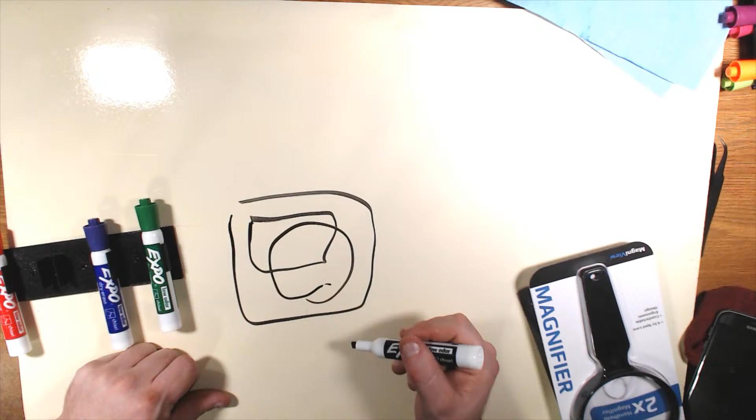I left the house after dinner around 6:50 and went to the dollar store, hoping they'd have some kind of cheap magnifying glass for this project. The do-it-yourself projector is basically just taking your cell phone and putting it in a box so all the light goes in one direction, and then in the front you put a magnifying glass. You can adjust the focal length by moving the cell phone, or in this case, we're going to move the lens back and forth. So that's the plan for today.

I went out looking for a cheap magnifying glass. The dollar store didn't have one. I was also looking for a couple other things at the dollar store I've been meaning to pick up, and they didn't have any of that stuff either. Went to a different dollar store in the same strip mall as a Five Below. Neither of those had them.

Decided between the dollar store and the Five Below—I'm blitzing through this quick because it's way later than I want it to be—but there was a thrift store. I decided to stop in there too because there was something I'd been wanting to get at a thrift store, and I figured, it's right here, may as well stop in for 15 minutes. Spent 15 minutes in there assuming Five Below would have the magnifying glass after the second dollar store didn't. Did not happen.

There was also a Staples next door to the Five Below. Did a quick price check on that—they were way more expensive than I wanted to pay. So I did a quick Google search and ended up deciding on Walmart.

Walmart's 10 minutes down the road, so we'll go down there. Meanwhile, we're now at like 8:10ish, so I've been out for over an hour at this point between traveling and going to all these different stores. So I'm like, all right, whatever, hit Walmart and be done. 10 minutes down the road, 10 to 15 minutes home, 5 minutes in the store hopefully—another 25, maybe 30 minutes depending on what happens. Bit later than I wanted to be, but it'll be all right.

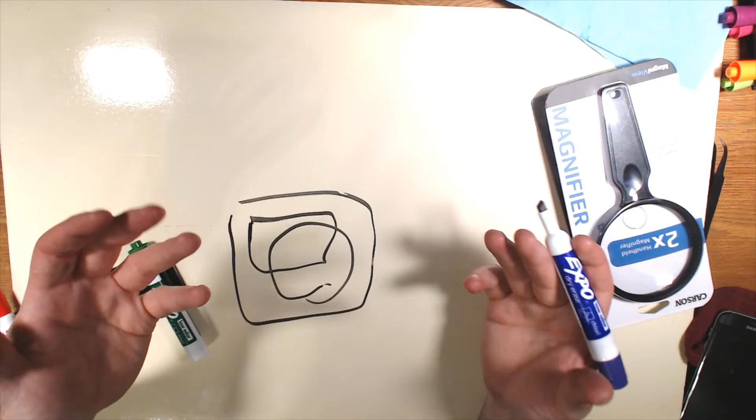I had considered going to a grocery store, but figured it would take longer to find it inside a grocery store than stopping by Walmart. That's the point it occurred to me to try a grocery store—that's another option. So if you're looking for a magnifying glass to do this project, at the very least Walmart, again $5.50, not bad. Wasn't the under-$5 price I was hoping to get at the Five Below or the dollar store—again, the dollar store now carries items above $1, for the record.

Anyway, those are your options in case you go looking for one of them. Walmart, $5.50, at least in my area. And then otherwise, CVS or Rite Aid may be a good place to check.

With this project, normally the super simple DIY version is to put it into a shoebox. I do have a shoebox available that I could use, but I figured I may as well do this properly—well, properly, this is still a DIY thing. What we're going to do is use my 5/16 rods. I'm also going to leave the door open to use extrusion, but it makes more sense to use 5/16 rods. So we'll have these set up in an array like this, just a square.

I'm going to have a back plate to hold the phone and also hold the rods. So rods will go into the back plate, and the back plate will also have a clamp to hold the phone. Then on the rods, so that we can change the focal length of the projector, will be the lens. That will have four little riders—four little connection points for the extrusion.

I'm also considering putting hinges in between here, because I'm not 100% sure, since I've never made one of these before, but I think there may be a possibility where we have the phone, and then our box. I just didn't want as much in the way, that's why I'm drawing it over here. And then the magnifying glass at an angle—I'm not 100% sure this works, but if we can, the light goes this way and then refracts in a different direction. This seems like an interesting idea to me.

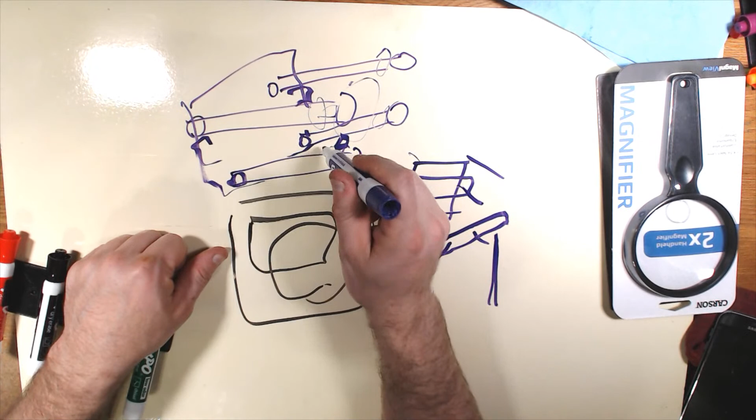So we may put hinges on these round parts. That may be something I add later. Again, I wanted to have this stream started by 8, and it is now nearly 9—let's double check that, yeah, nearly 9, 5 of 9. So it's getting quite late for me, relatively late. I want to have this done a lot earlier.

So hinges are not a priority. Holding the lens in place is, because currently my plan is to mount this overhead and project onto my workbench at work—that's what I need this for. So the little riders that the magnifying glass will be on, I want to put set screws in to hold it in place.

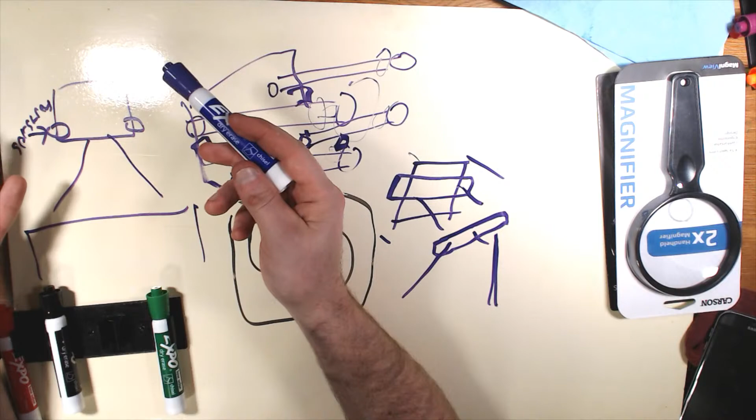So that is the plan. One of these situations where if I don't put the hinges in, we actually only need, let's say, 2 set screws. We could put all 4 in, but I'd only really need 2 to make sure it's relatively straight and stable, just opposing corners, and not sliding down. I may even get away with 1, but 2 seems like a reasonable minimum.

So that is the plan for design. I think I color corrected and did the exposure right, but I had unplugged my camera, so if anything looks a bit off from previous streams—I don't think it does, I think it's about right—but in between my camera being unplugged and the settings resetting, and this light over here, the hinge on it is actually gone. So it is literally staring straight down at the table instead of a bit at an angle like this one over here.

We are 8 minutes into the stream, and we're finally ready to start designing. Let me move my stream off the screen you're about to stare at when I switch over to Fusion. And here is—okay, that is not Fusion evidently. Desktop not available. Great. Desktop. Shoot, I sure hope this is desktop too. All right, cool, it's desktop too.

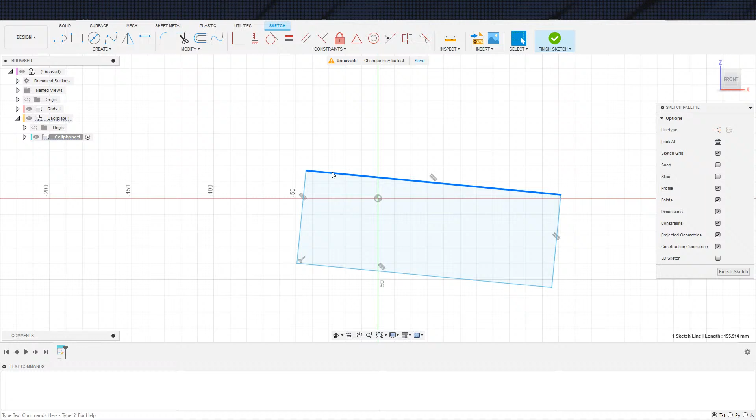So, cell phone front, there it is. Go ahead and toss that in there. And as I mentioned...

Extrusion might be more available for people. For the record, I said 5/16 rods, right? That's what I have because I get them for free out of the scrap pile, but 5/16 is basically 8mm, a little under 8mm. So for this specific set of STLs, all you would have to do is just drill out the holes to 8mm in order to get them to the desired diameter.

So I'm going to call this 12.5 on thickness. So that's our cell phone.

Black plastic. Plastic, where's plastic... glossy, black.

And then we switch over to face, and toss the screen in there. Or LED, I guess.

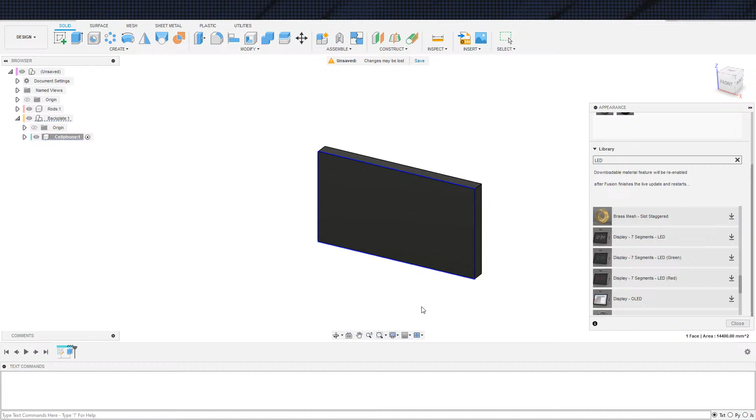There we go. Didn't they have... oh, there it is. I was going to say, I thought there was another option for that. Oh, I was on the back end. Good thing it did not take. Huh, that is funny. I've done... oh, it's not downloaded for some reason. I know I've done this before.

For example, on our phone holder, I put the screen on there. Huh, okay, display. Do I have a display? Okay, there we go, LCDs. Excellent. Whoops, that is not the face though. Face. Display. LCD. There we go, all right.

Upside down, but we'll live with it. So, that is that. We can go back to the back plate.

Actually, one other thing to mention: I'm assuming that it's normally inside a box in order to direct the light. I have these cloth napkins that I was using for recording videos, for placing objects on just to make the display nicer when I was doing the product displays in my earlier videos.

I just plan on using those to wrap around the rods here. It's one of those things - however you want to enclose the rods here is entirely up to you.

And also, the nice thing about cloth is that since we're sliding the lens back and forth, so long as you fully encase it in cloth, the cloth will just crumple up. It's cool, it's fine. What I'm basically saying is that the cloth can be attached to the front lens and the back plate, and as it gets shorter, the cloth just crumples up. That's the idea - I could have said that in a better way, but you know.

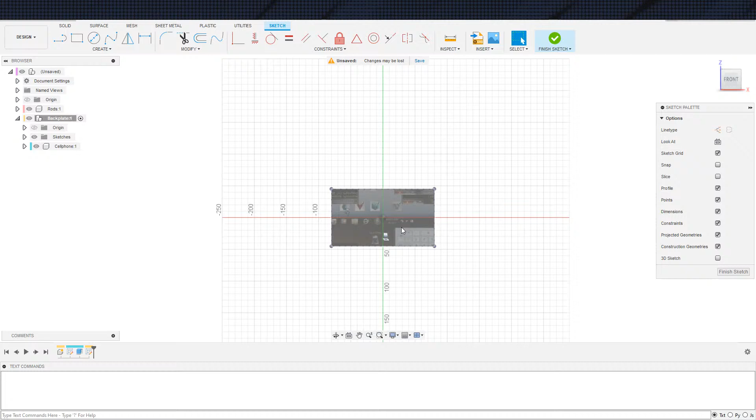The magnifying glass that I've got here is a 3.5 inch, I believe. My calipers are saying something like 96 millimeters. So if we, in theory, call this about 100 millimeters, I was thinking of doing some kind of clamping mechanism for the magnifying glass, so that in that case we can make it adjustable to accept different sizes.

It is a little bit tricky though, because most clamping mechanisms are biased towards one direction, and for that reason it may not work out as intended, unfortunately. So that may be something I have to change from my original concept.

Lens, or I guess I should call this lens plate, because I planned on mounting it onto a plate, which then would attach to the rods. Oh no, that's right, I was going to do a plate and then the hinges. So actually it's a question of how exactly that should be designed.

Alright, so again, I need this printed by tomorrow morning, and it is quite late. For right now, I'm just going to do a lens plate. We may revisit this when I go to release the STLs in the near future, and I will have included the hinged version. But since I don't know that I have the time to do the hinges, I'm going to go ahead and skip them.

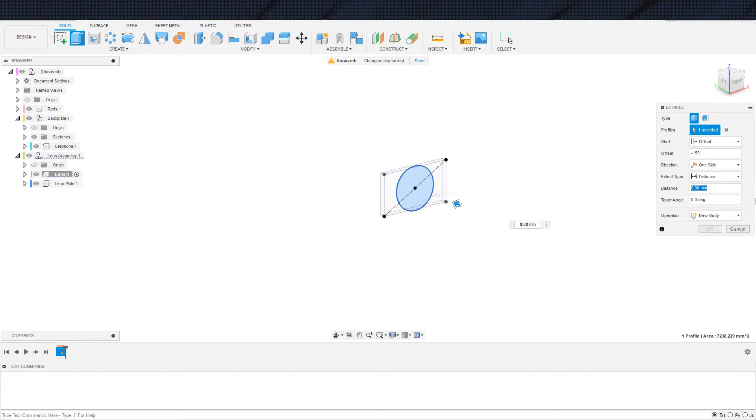I'm mixing things up. So the thickness on this, now that I have it open, is 13.75, so we're going to call that 14 millimeters. Actually, no, I should keep it at 13.75 - I shouldn't round that one.

It's one of those things - the geometry here is a bit different, however, and this is the one thing I'm a little concerned about. So yeah, I don't feel like going back to the store at this point. The lens has one of those bubbles, one of those additional magnification bubbles in it. I don't know how that's going to screw up the projection, which is my biggest concern at the moment.

Unfortunately, of all the magnifying glasses I looked at that were available in stores - when I searched Walgreens and when I searched Walmart - I believe all of them had the additional bubble, the additional higher magnification bubble in there. I'm going to do a quick search on Amazon really quick to see what they've got. I didn't want to use Amazon because I needed this magnifying glass by tonight, but let's see what happens.

Okay, so I see one, two - yeah, it doesn't look like that one. Alright, so they have a relatively cheap one, actually a couple relatively cheap ones, that do not have the additional magnifying glass in there. They are also 100 millimeters, which, if that's the size of the lens, would make it larger than mine. Although it's possible that's not actually the size of the lens - that's the size of the outside, in which case it's more or less about the same size as mine, about 5 millimeters off-ish.

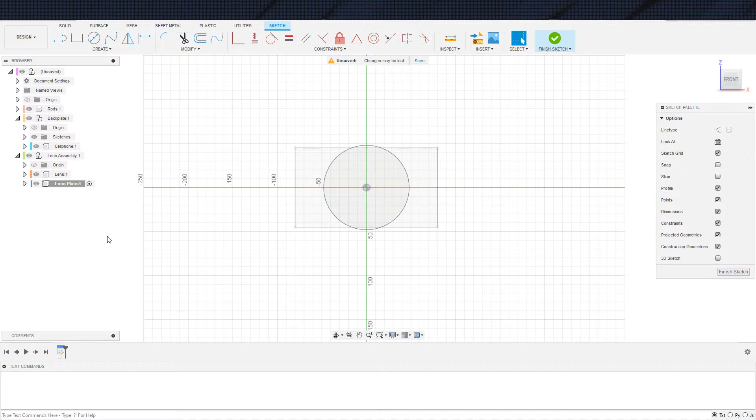Actually, because mine has this plastic rim on it, I can probably clip onto that no problem, so that's what I'm going to plan to do. So that size I have written down there is not the actual size of the lens - that's the size of the outside plastic rim. So at 83 millimeters we have the actual plastic lens, 83, and I can go ahead and toss some clips in here.

Makes sense, and we'll probably just do that with another circle. So let's just go 3 millimeters here - that's all we should really need. Although, I'm just thinking there's a little bit of a lip on it, and that's about 3.5 millimeters, so I may want to go a little bit bigger than that. Maybe do this - maybe make it a 2-step.

I'm not really thinking ahead on how this is going to print, which is the one issue I'm seeing here. So that's going to be a little bit of a concern, and I will make this plate round for right now - that makes sense to me. And then we just need to decide... I guess I should - nah, I only really need.

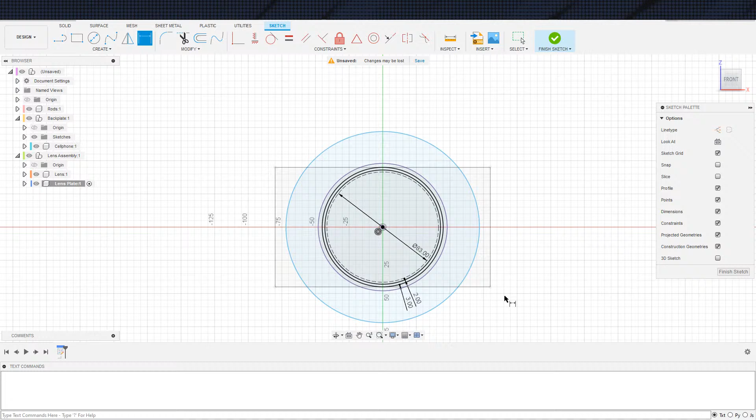Remember how I was talking about the fact that we have cloth around here and I wanted to do hinges? If I made this a square plate, a rectangle plate, a parallelogram plate, that would create a solid edge for the cloth to attach to, so I can wrap the cloth around the box like this, and that's super easy.

If I did a circle here and then did legs out to the corners to attach to the rods, that actually would leave gaps for the light to get through. And I think the idea is to keep as much light contained inside the box as possible. So that may be a bad idea, and we may want a solid front on this. That's my intuition. I've never made this project before, so I'm guessing that's an important feature to keep in mind.

In that case, we're going to start out with just a rim to work off of, and then I will do the back plate. From there, I will extend this rim out to whatever is necessary. This is just the start of our plate right here, just to get an idea of where it's at, so we can project off of it for the back plate to get a height. Then from there, we can adjust this front plate to match the back plate. That is the point here.

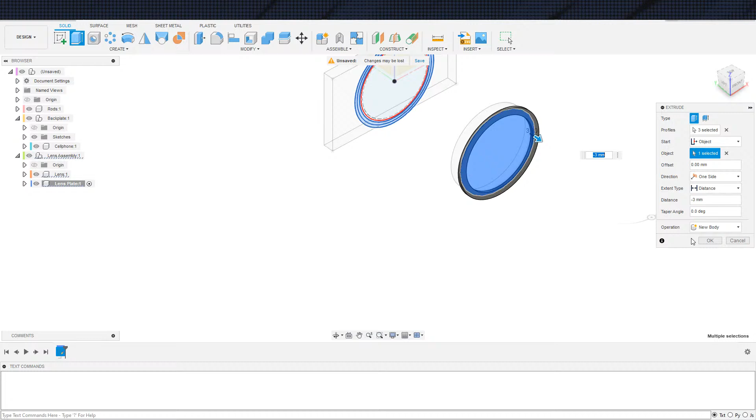And I will go ahead and do the clips right now. I don't think there's any reason to wait on doing the clips. So let's hop back into that sketch and toss my clips in here.

Assuming that I'm going to put the handle out this side, I will go ahead and... actually, it occurs to me that the handle is going to have to come off, because the handle would have to go through unless I put it on the outside. You know what, I can put it on the outside. So that does change my orientation here a little bit.

Alright, I'm gonna put these clips in really quick. Let's just get that done and over with because I keep on procrastinating. Let me grab this as a reference. Actually, no, I can just use the center of this tool. I was just trying to grab some center points to work off of, but those can be that dot right there.

I think this one was the one I just did on the other side. I just want to try to have them on the same circle. So there's some center lines to work off of, and now we can go ahead and toss this in here. Get a center line point to line it up with. Click that, and actually, I should be able to just rotate this around.

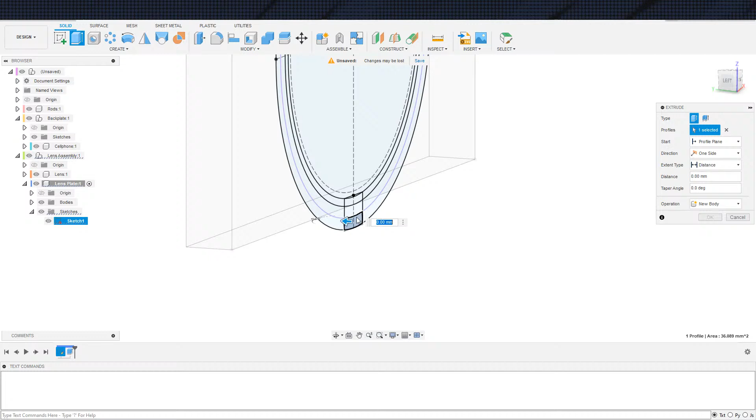And again, my orientation here, actually let's fix that really quick, because I'm actually going to want to come this way with it. And that will now be a positive number because we're going in this direction. Now we'll come back and fill in this clip.

So it's just there, from object, there, distance, object, here. Okay, and then these three guys, from object, there, and we can just go 3 millimeters. And then this guy, again, going down into, around rather, that rim that I mentioned. My depth there is pretty deep. I can actually go pretty deep with that.

But, oh no, I take it back. It looks like it's pretty deep, but for the 3 millimeters out that I'm going, I'm actually only going to be able to do like 2.5 millimeters, unless I came further out into the lens, which I don't want to do. Or not into the lens, but into the rim. Therefore, minus 2.5, we'll just stick at 2.5.

And then I do have to add some geometry from object to it because the geometry is... oh, not my... there we go. Join. Because the ring is round, so we have to go ahead and toss this guy in here. And I'm going to go as far as it wants to let me. Okay, it wants to let me go a lot. So I will stop at...

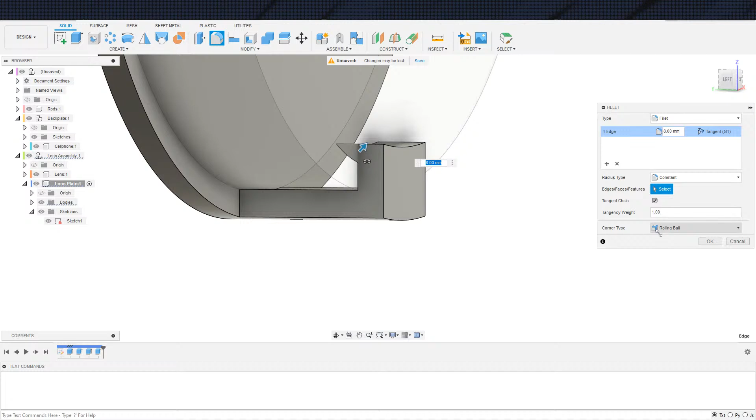One of those things, it's not actually necessary for me to be super precise. And actually, I cannot get the larger fillets in here because the lens is in the way. So, unfortunately, we are going to just have to guess, or use my best judgment, is what I was going to say, but I'm not really making a judgment. I'm just kind of saying, that looks good enough.

The one issue, I guess it's not going to be that bad. I was going to say, this is hanging. This plate will be printed on this face, so that is overhanging. However, it's probably not going to be that bad. We will have to use supports. I try to avoid supports at all times, or in all situations that I can. This will not be one of the situations where I can get away with not using supports.

Just going to have to be. Do we want to stick at 3 like that? It looks to me like the lens handle. I mean, if the lens is on the outside of the plate, then the lens handle doesn't necessarily matter which way it's pointing. So we could just do those 3.

I was thinking my original plan was to go 4 and then just suppress this one over here. But it shouldn't actually make too much of a difference to only have 3. The last issue that I can see is just getting it snapped in and out.

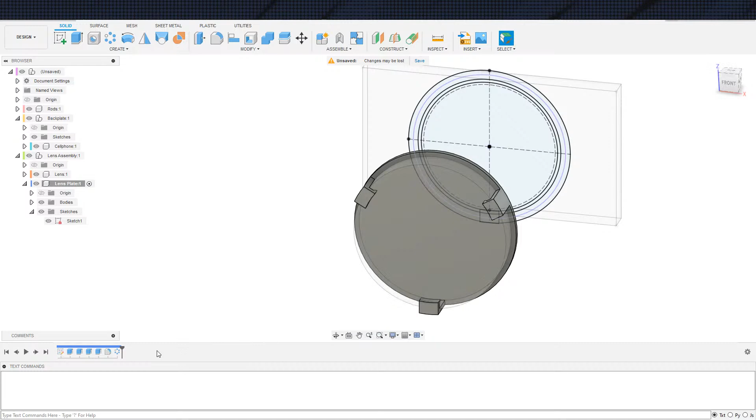It may be better to, instead of that 3mm that I have here, take this down to - actually, it would not even be this 3mm here now, would it? I would actually want to toss another circle in here. Go 1.5 right here. And then finish, adjust these extrusions right here. So adjust that one, adjust this one. That should be enough.

My body yet? There's my body. All right, cool. Yeah, so now that's a lot thinner. That should be a lot less difficult to get these things snapped in here. It's still going to be difficult, actually, now that I think about it.

Let's see. If I went to 4, suppress, click that guy, then back to these lips, whatever I'm calling them, lips. Probably do a good enough job holding that in, so I can slide it in from the side, and that should probably be fine. Okay, I'm gonna go with that one. So we're back to the original pattern here. Just gonna make it easier to get the lens snapped into place.

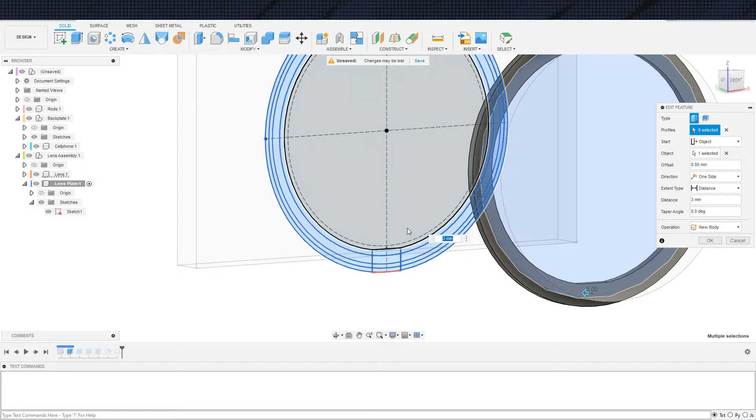If this does not work, I will cry, but assumption is going to - that is my lens right here. There's my lens. Yes, the dashed line is my actual lens. We are a little past the dashed line, so that's the acrylic right there.

What did you just do? So we will have a little bit of plastic in the window, is what I was saying. So as you look through this front, wait, what are you? Okay, so that wasn't me the first time. Evidently.

Okay, just so that we're on the same page. You saw me fix my selection there, and then Fusion decided to break it. Okay, ready? We're here. I click this. There's a hole in there. I hit OK. There is no longer a hole in there. Fusion, go home, you're drunk.

What in the world are you doing? And I've got the stupid paint select on. Why does this tool even exist? Okay. Okay. Let me turn this off. Let me turn that off. Gonna do that. Deselect that. Deselect that.

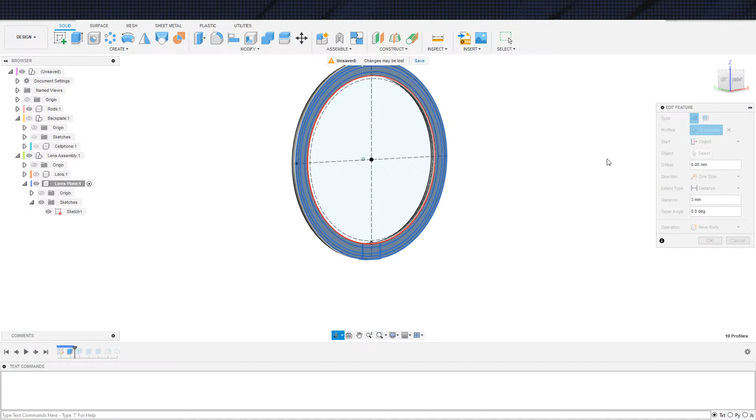I'm going to select lens at the back of the. Okay. There we go. I think what was happening there, even though the picture was updating correctly, it's possible that when I was deselecting, it was changing the offset. Although, no, that doesn't make sense because the plastic was all the way out here. I don't know. Fusion was just drunk. I don't know what to tell you.

So, there we go. We got this in place. We have a general rough idea of where that needs to be. So now we can design the back plate now that we have both the cell phone. Although, yeah, I should probably design the clamp really quick on the cell phone. How do I want to do that? I think I'm gonna go ahead with the back and front clamp again, like my other designs. So we got the back plate, we got the cell phone. Now we need the cell phone clamp.

I'll tell you what's funny. Because I see smartphone all the time, I actually double-guessed myself just now on whether or not that's how you spell cell phone, because I have not seen anybody actually say cell phone. They normally say smartphone, like, forever.

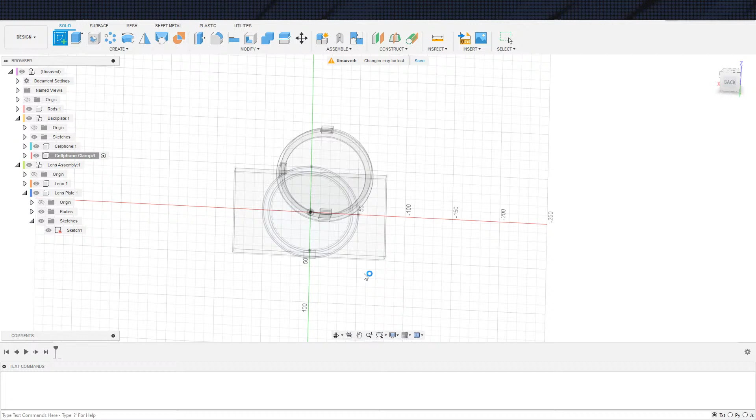So, project that out. That is the largest size I need, so the clamp needs to be capable of moving closer.

For sake of the argument, I'm thinking, nah, I probably won't. Never mind, I take it back. I was thinking about putting a little lip on the bottom here to keep it from sliding down, but probably what's going to happen is on the back plate, I'm just going to put a little ledge to keep it from sliding down. So instead of building the lip into the clamp itself, what I'm trying to say is I'm going to go ahead and just do it as a separate component on the back plate.

And I'm going from the top here because that should be easier to design. Let me turn the sketch off. Then we can turn the rest of this off because I don't need it now. And now that I have the projection, I don't need that. We can do that. And now we just need to draw a little bit of a clampy boy.

So I'm going to start out here. Was that two lines? That was in fact two lines - good old Fusion double line. So this is right-angled. That is fine, we will put this at 8mm. Probably sounds fine to me. And then...

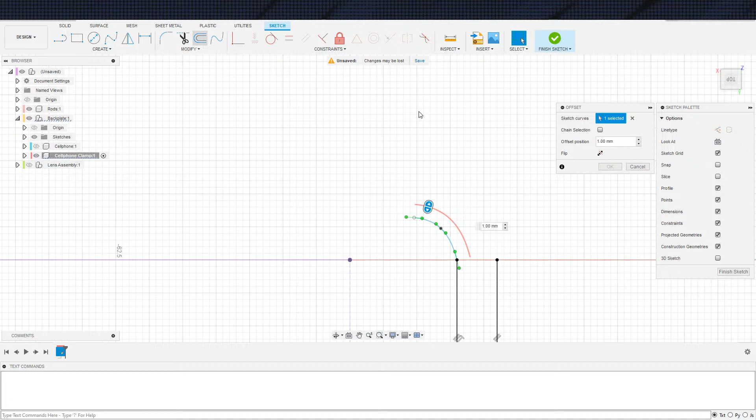And finally, we can just draw a little bit of a flip here. Where is my... okay, there's my okay, all the way there for some reason. Offset. See what offset looks like. Yeah, it's not going to connect. We can make it connect. That's fine, so you are now just going to come all the way up here.

The other idea I had, for the record, was I would do the back curve instead, and then offset the back curve to the front - that was the idea, that was the alternative idea. And honestly, that's probably good enough.

So, cell phone back on. It doesn't necessarily need to be the whole length of the cell phone. So let's do a two-sided symmetric hole. We're at 96 right now, so let's make it 50. And then this is going to be a new component for the right clamp, or I guess left clamp.

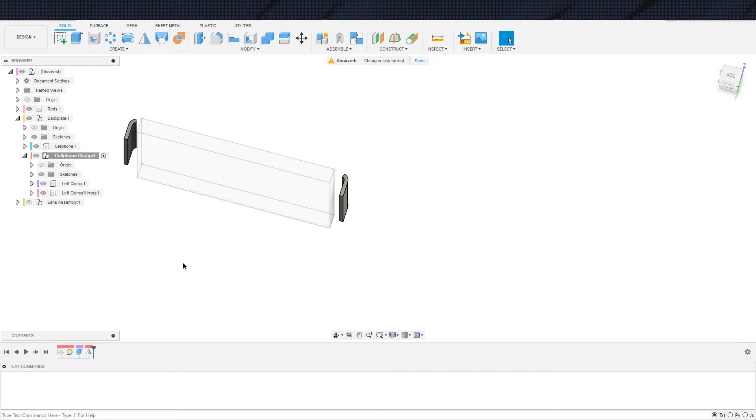And then we can mirror this across - component, left mirror plane, that guy. Okay. Although, let's see... nah, I guess that's fine.

The only thing I'm going to change, it occurs to me, is that guy - instead, because we need some stuff in the back, we'll make this like 6. Again, I'm going to make this similar, I believe, to my other ones, so I'm going to put a dovetail in here. Although it's not going to be strictly similar, is it? No, I can make it.

All right, I was going to say, because the plate is going to be larger - so on my other designs, let's go ahead and pull up one of my other designs, just for reference. Oh, no.

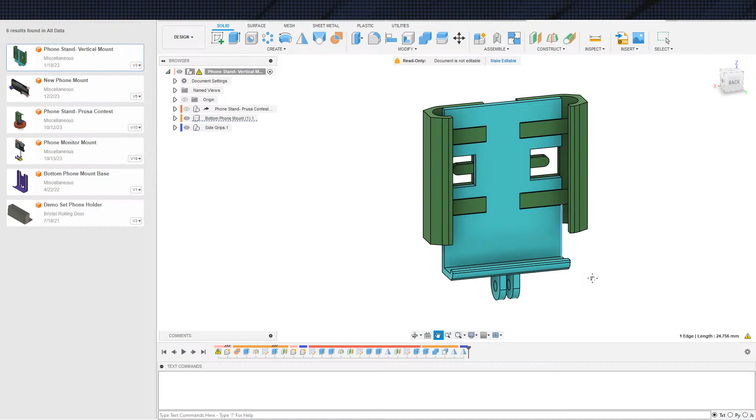Not that - kind of like how these two are attached to a third piece. However, you see how they're on the outside of the third piece. I was thinking that was going to be a problem, but it occurred to me that I can actually make this part right here above the rest of the back plate. So that is why I said it was not going to be that big.

Let's see here, I'm gonna back up here so that we can work on this guy first, and then it will get mirrored.

Just like this one right here, I'm going to have just these two flanges with a cutout for the rubber band, and then on the piece that I make, that will accept both of them on either side. That is the plan.

The distance these guys can travel will be determined by the length of their dovetails, so I want to keep that in mind. I can't go all the way to the center and mirror it. Actually, I kind of can. Instead of mirroring it, I could do a circle pattern around the Y axis, a two-part circle pattern with the dovetails offset, so they wouldn't run into each other.

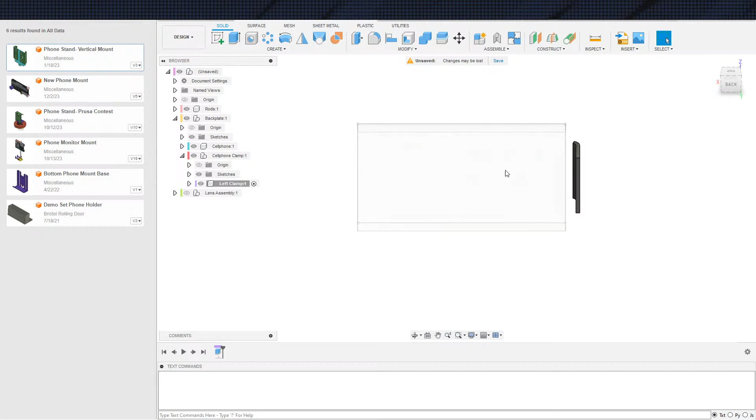I'm guessing it's a little under 3 millimeters, or 3 millimeters exactly. So yeah, that's a 45 right there. That's why this ended up being a weird number, 7.2, instead of a number I would actually put in. So, all the blah blah blah out of the way, let's get that actually implemented.

And was this also 3mm? That was the other question I had. No, that is a 6mm thick dovetail. Oh. Am I content with that? Let me look at the one I have sitting on my desk right over here.

Funny thing is that it doesn't really feel thick. I guess it does, I take it back. I don't know, that still feels thin to me. Let me take a quick look with the calipers. Oh, see, that's cool.

I'm confused because I have this printed out right here. Let's Control Z really quick and inspect this guy. Yeah, that's only 3mm. So how did I get 6mm between here and here? I didn't, evidently I'm hallucinating. I guess what may have happened is I accidentally grabbed the back face, and that would be 6mm. Okay, that would make sense. Much better, much better, okay, I understand.

So let us get these dovetails in here, and I will go with that idea of offsetting. Toss that out, turn the other stuff off, cell phone off. We can turn the body off as well.

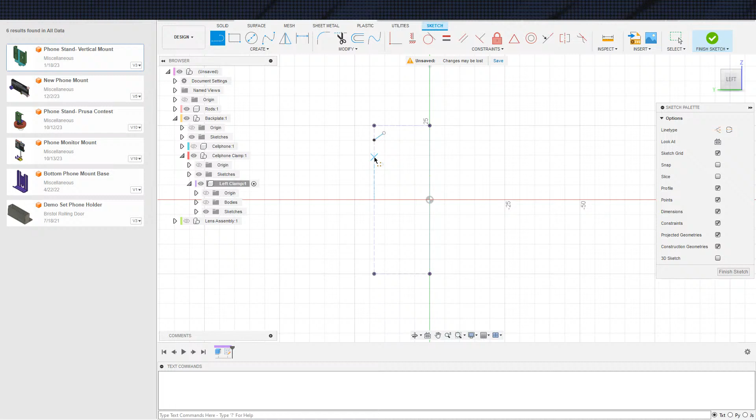Let's see, the back plate can be bigger, so let us come all the way up to the top then. And then this is going to be 45 - actually, no, it's not, it's going to be 60. Don't actually want you to be like that, I want you parallel instead, please.

Do this as 3. Hit that. And then, do I want to go this? Yeah, I guess I just want to - we can just take this all the way up here. That's fine. And then we're going to have the cutout in the middle here.

So I guess I may as well put that in there, let's see what I did for that. That is 15mm and 15, and 7.5 and 2.5, so 5mm. So 7.5 plus 2.5 is 9, 10, so 10mm to the top of the circle. Gotcha, 15, 15, 10 to the top of the circle, 5mm diameter.

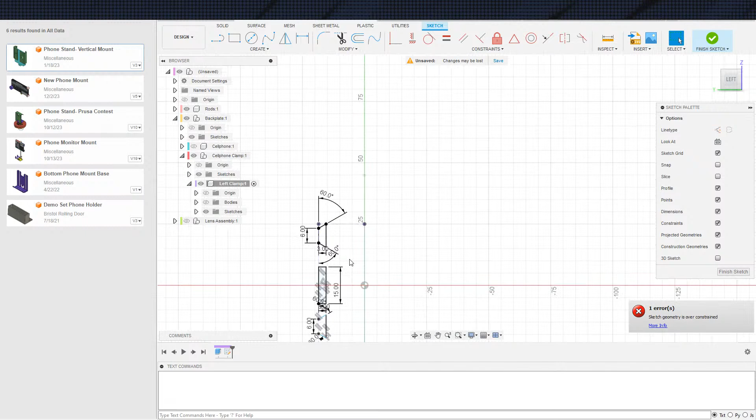I just realized those were supposed to be offset from the other side. Whoopsies, okay. I forgot I need the back plate in here. This is the front, right? Turn the body back on. Yes, that is the front over side.

So let's fix that really quick. That's actually not going to be a really quick fix, unfortunately, but what I can do - actually, we can fix it quickly, I take that back. What we can do is toss this guy in here, then go linear, get you guys all doinked up.

Then just move you out of the way. Oh, that is what's happening here. Go in there. There we go, much better. And I can come back in here and just project that guy. There we go, and now this is 3mm right here.

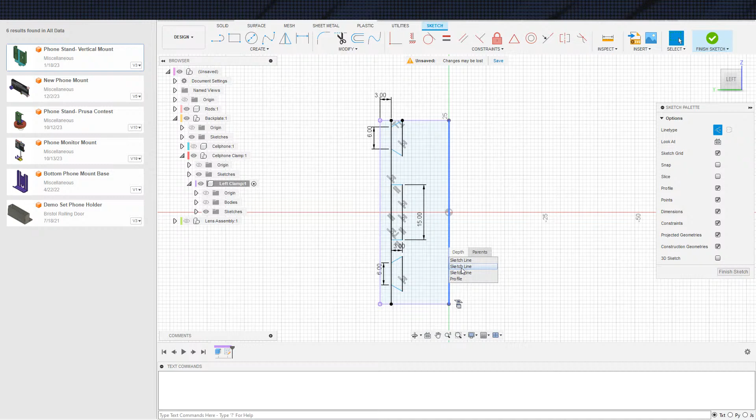And actually it occurs to me that these guys, because I need to extend that, should all be - well, you do not have, you can stay as - why do I have two lines here? Huh, I guess I have another sketch active somewhere. There it is, okay. Oh, I lost my 60s.

And we can leave ourselves a 3mm wall here, right here. And that's 15. We just need to make this 3mm. No, okay, what is unstuck? Oh, that's what's unstuck. Okay.

It occurs to me that I do not have enough space here for this when this gets flipped over. So these will now get adjusted down to be smaller, and now I should have enough space when this gets flipped over to the other side. So we extrude body.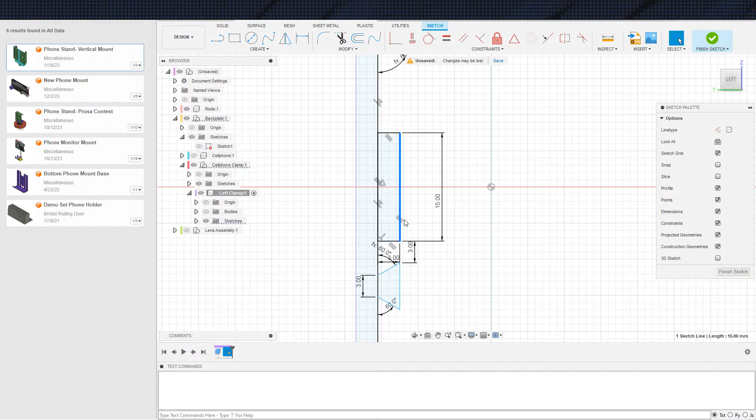Okay, I may have made some mistakes. This actually needs to go that way. Yeah, I know. So this is the cutout in this back wall. I didn't have the cutout in the back wall to begin with, so that is why we ran into this problem right now. Go. And now we toss you back in.

Okay, so now we extrude that. From object, distance to object.

So I did this so these guys can overlap. We are going to join. So in theory, it could go all the way here. Actually, no, it can't go all the way there because this back part is still going to be in the way.

I don't particularly want to... you see how this lines up with this edge? That's what I'm getting at right now. So I don't particularly want to just have these guys, these dovetails, floating off the edge here. I can, technically speaking, but I don't particularly want to.

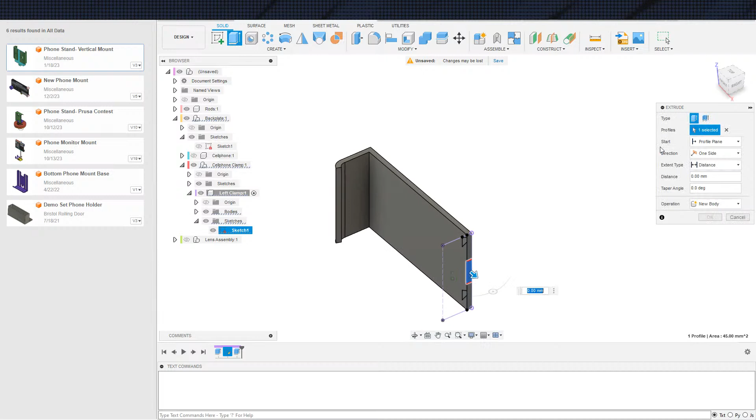Let us see how that works out. I'm going to go ahead and try that. So this window comes from object here, 15. Okay.

I guess, yeah, one of those things. That window didn't technically need to exist there. At the end of the day, I do take these all the way from the edge, right? Yes.

Actually, yeah, no, I should use from object here, distance to object there. Join. This window could have been drawn on this sketch right here because I need to add this internal geometry anyway.

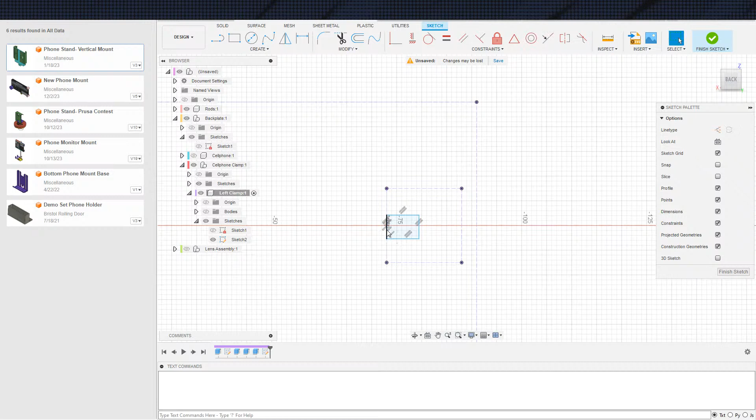And again, Fusion, it would be greatly appreciated if you assumed that I knew what I was doing. Linear there. Linear. Centered. 5.

And, actually, I guess I just make this 7.5, right? Rather than throwing an extra center point up here, drawing a line, drawing a center point all the way at the top, it'd be easier to just do it this way.

Body from object there, distance to object there. Okay.

I guess what I should also do here is toss this line in here and the body off so I don't accidentally grab it. Toss this line in here. Do like 40 here. Nah, maybe 30. And then re-solidify these guys, and just cut that.

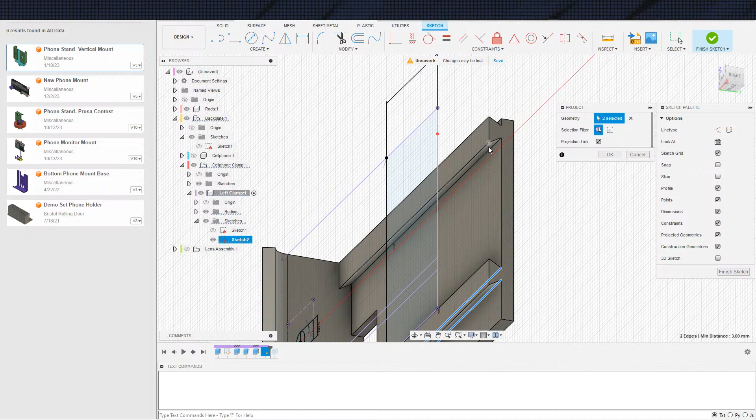I was thinking about doing this a different way, but I have currently figured it out. So, project body that... got a lot more complicated than I thought it was going to be, but again, because I didn't want to do it the other way, we will be doing it this way.

Okay. Now we can come back up here, and instead of this mirror, again, I'm going to change this to a pattern. That should be a pattern component around that axis. Down to 2. Okay.

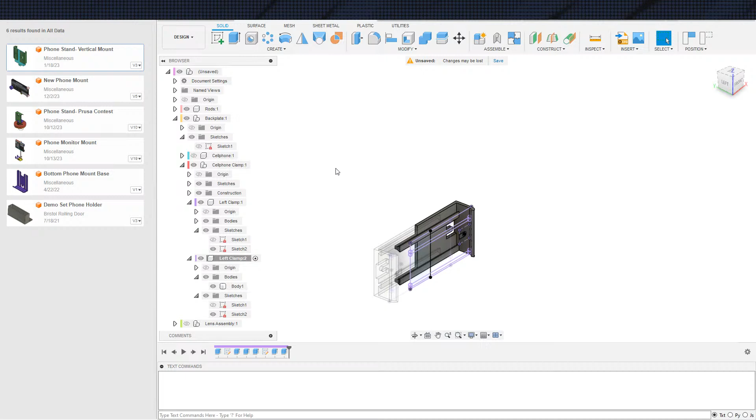I think we can. Capture position. We'll turn the other one back. There, we just make a new body. Remove tools. Go.

And now will you let me cut it? That guy and that guy, no. Oh no, Fusion, no. Come on, it's a brand new body, it doesn't exist anymore. It's still linked. Crap.

Could have sworn I was so confident that this boundary fill was going to work.

So instead, I guess, delete all items after. Delete. All right, instead we'll boundary fill like this. New component, that guy. Remove — don't remove tools, no, don't remove tools. Okay, there we go.

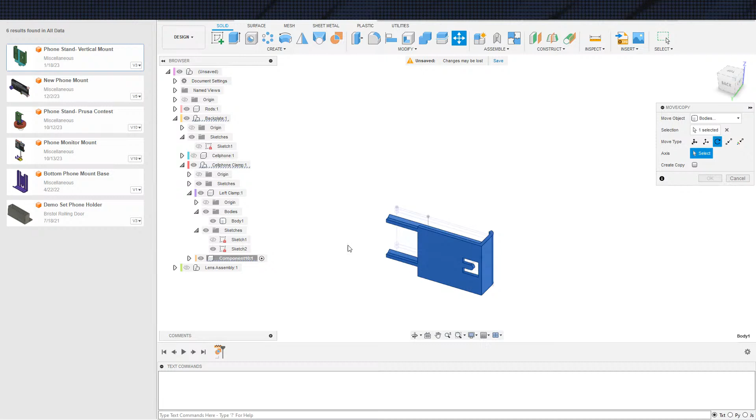So now we have this. This should be separate, and we can take this, move body, rotate around that axis 180 degrees. Okay, and now we can back up in here, get that. And the reason I'm putting this plane in here is so that after I align these, I can move it back to that plane.

Component, that guy. Okay, capture position. Combine that with that. There we go. All right, we did it. Keep tools.

And we do the other way as well. Combine that with that, tools. Okay, and now once we move this guy back — hide you. Oh no, I lied.

Align body. And the reason, again, I'm using body is because Fusion actually remembers body movement as opposed to component movements. I don't know if I actually screwed that up earlier — if I did the earlier align, I may have forgotten to do that. But anyway, I'll cry about it.

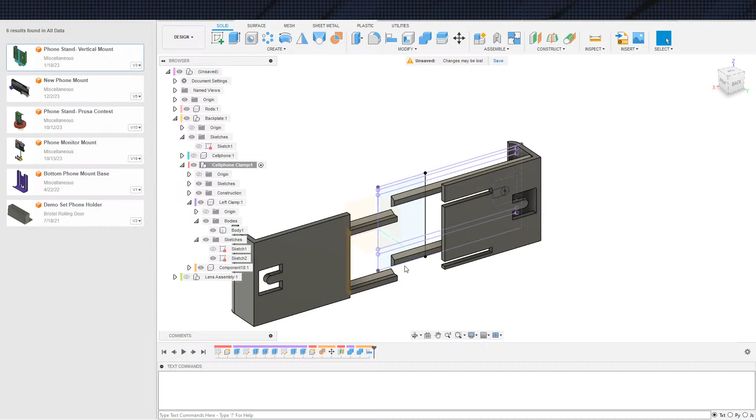This is not cut. Huh. That is cut. But this guy is not cut. Oh, I cut part. Ha, okay. We cut this. Let me just take a quick look.

I understand what's going on here. But let me turn off this guy, screw these back out. There is almost certainly a different way of doing this. Actually, yeah, they're okay. We are going to back up a little bit here. Okay.

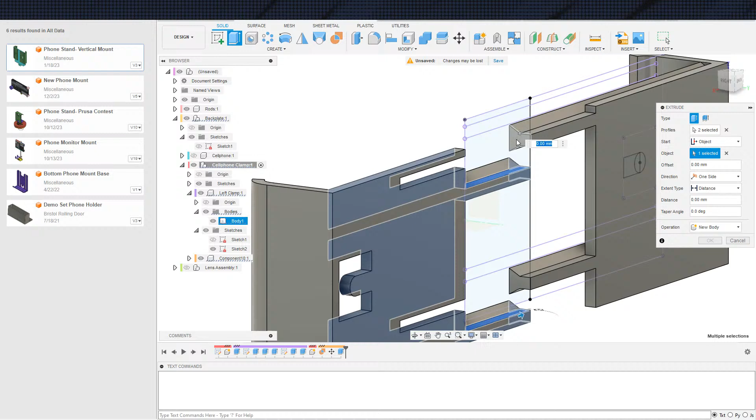The other way of doing this is 30, right here, as we know. So what I can do instead is go from object there, 30 millimeters, and cut. And then same thing over here, from object. Actually, at that point, okay — at that point this actually works, because that will just get me patterned, since they're linked. So, from object, 30 millimeters, cut. There we go.

All right, now we need the back plate on this design — this guy right here. But again, we're going to modify this so that it can work with this and can actually be assembled. So I can close this guy, we're not really using that guy for reference.

That's fine, that's fine, that's fine. Where's the sketch at? I'd like to turn the sketch off. There we go.

I probably am going to do this as a separate component — cell phone clamp attachment. And then we will boundary fill this onto the back plate. Actually, it shouldn't change — this actually should be universal for any cell phone. So in that case, we don't need to. We can actually just make this the back plate.

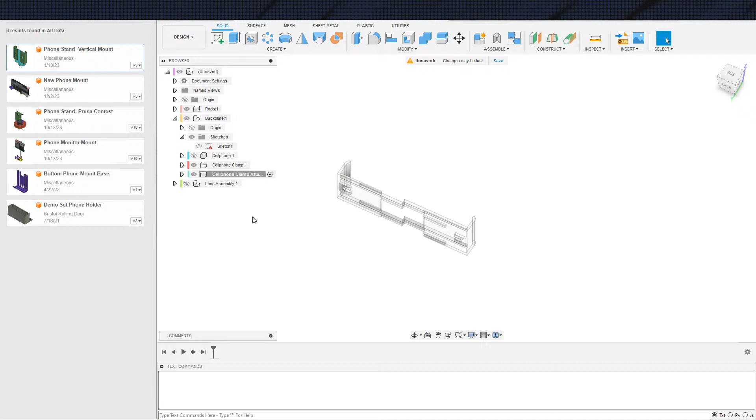So let us go ahead and draw the back plate. So there is our lens — we want to grab that as a reference for how tall we can be. And then we want to grab these guys as references for how wide we can be.

And then we can turn that stuff off. We want to get a bounding box for that. Cool, that's parallel, very good. Thank you for once.

And then after we have a bounding box, then we can put an offset in and also model out the rods, where the rods are going to be. So, here is a rod — I'm going to call it 5/16 times 1 inch for myself.

Again, you can just drill that out to the full 8 millimeters — as you can see, it is very close to 8 millimeters. Actually, back to extrusion, that is a good bit bigger. I probably should just predefine for that in this case — in this one case.

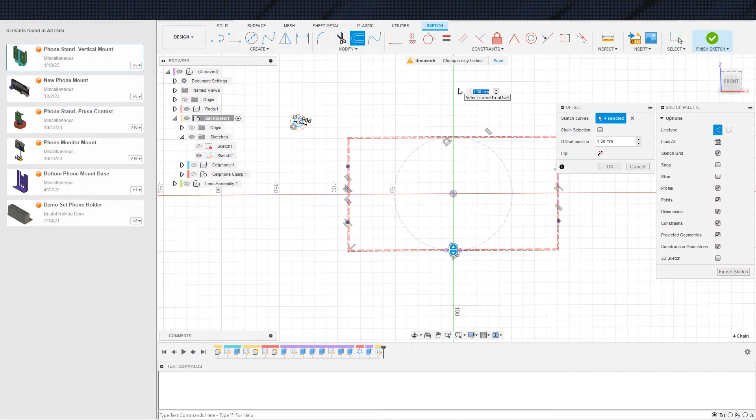Let's give myself 3 millimeters right here of minimum wall. And then we probably want to go offset from this — I'll just offset from this. Offset minus, let's say, 10 millimeters. I'm going to ignore this one up here.

I am going to, let's see — I think I'm going to put this like that, and then this like that. Yeah, I didn't really think I was going to use this top one, so that's fine. And then, X to get out of construction.

Again, Fusion, if you would just — that's fine, I'll take perpendicular. We can then make you that, and toss a center line here and have it go through this center line. Actually, I guess instead, because we want both of them, we should use the center point. Okay, so fill all that in.

Let's grab the cell phone clamp. And again, I'm going to put this behind and then make another extrusion up and around. And we will offset by just a little bit — I was thinking 1 millimeter, maybe 2 millimeters. Then 3 millimeters there is fine.

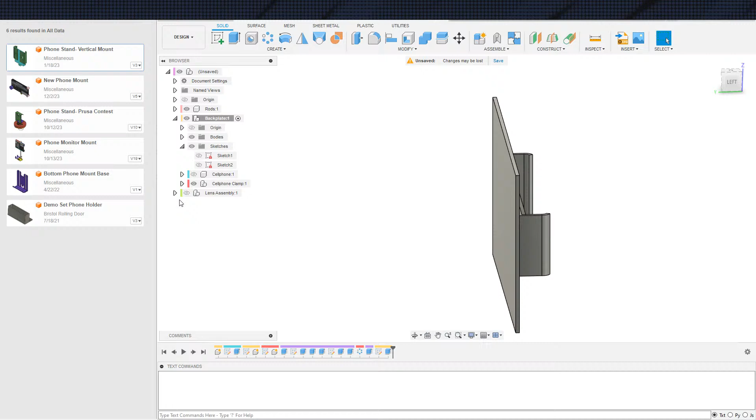We can go ahead and create — actually, let me come back here. Make that solid. Finish. And from object there.

I'm going to actually also give it a little bit of a collar to help keep it rigid. I'm going to go 12, I think, in the other direction, and then there's a hole for the rod. Let me just get all those guys set up.

Round corners. Okay. Mirror. That is boundary fill, that's why it looked wrong. I was sitting there thinking, that does not look right.

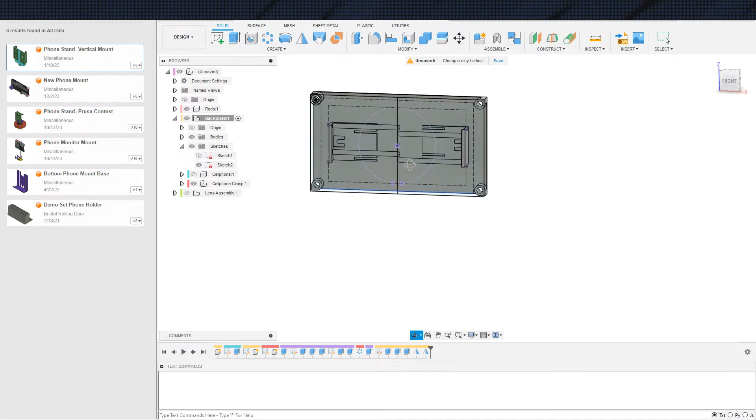There we go, all right cool. So there's the rod holders. Now we just need the center part. Now this guy did overlap and went all the way up to the corner there, basically up to this part right here, which for us is the corner. That does point out that I gave the other design more of a curve to accommodate the cell phone. Is that a problem? I don't think it is.

We are going to, actually, I think I'm still going to offset it a little bit from that wall. So in theory we go straight here and then come across. In theory. It's possible that I should have made this a curve. Let me toss my cell phone into the holder that I have on my desk really quick.

Also, we don't need this side window open right now, so let's give ourselves a little bit more working space. All right, cell phone going into holder. How much do I like that curve? I kind of really do like that curve. Let me grab a different holder.

The other one that I used previously, that one is much looser. Yeah, that is a lot more loose. Okay, so what is the verdict? I will be holding the cell phone differently. To be fair, I'll be holding it end to end, unlike the other versions which are held around the width, around the skinny part of it.

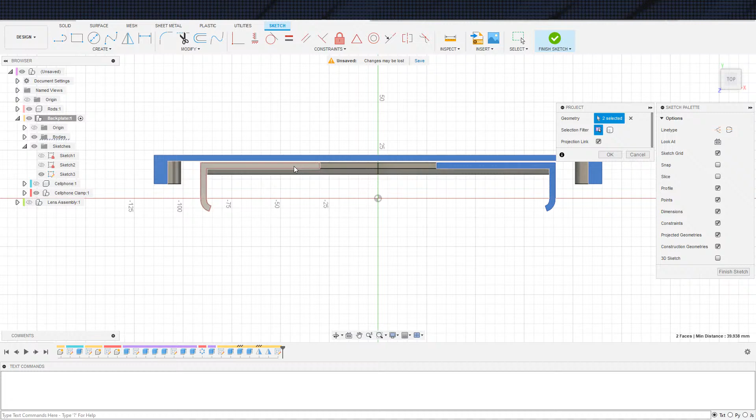Top. Project the back wall. Project that guy and that guy. Try to unselect that edge. Cool, there we go, just want the face please. Okay. Let's turn everything off so we can see what we're looking at.

See, that's only 3mm, let me open that back up. Okay, yeah, I did not project — I was going to say, did I not project the dovetails? Dovetails are a little important. So we now have those.

Forgot to turn them into construction. That's all right. There we go. And then, as previously stated, I will offset this by a little bit, about 5.

And then, so this is the dovetail — no, that's the dovetail right there. So I do want a wall in here.

Linear with that guy, going all the way across. And that should be good. So, turn you back on. We are going to — where is my cell phone?

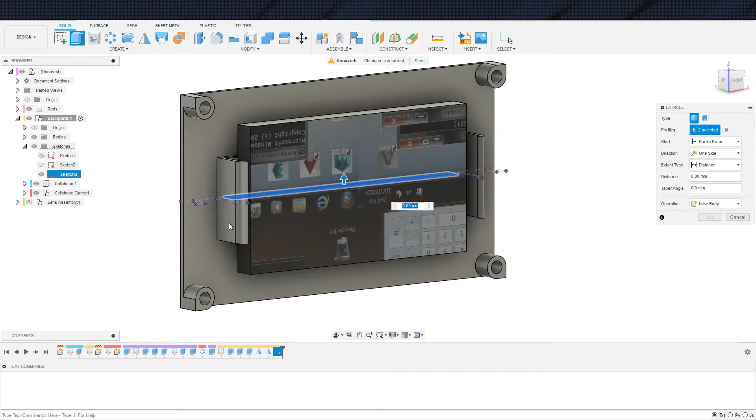Back to — I guess I'll do that separately. Never mind, I will do that separately. I could actually toss that in on the other sketch too, on sketch 2. Okay, I think we're fine, I don't think I need to change anything immediately at any rate.

So from there, again, we can offset by like 1 millimeter just to give ourselves a little bit of breathing room, and distance to there. Oh no, I'm sorry, not distance — distance, just distance. We just need a 3 millimeter wall. Should be fine, we can hit join.

So there's that, and then I extend it over here. Yep. Grab that sketch back. There, from object, bottom of that, distance to object.

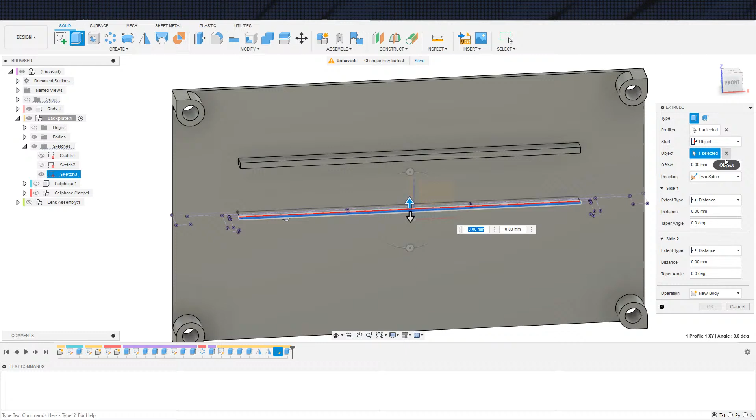Actually, I guess we're going to the center line, near it — that is 2 sides, not 2 objects. Fix you, thank you. Then to object here.

Join, and then we can grab these guys. Hit the join button. That to that guy and that guy. Keep tools. Okay. Then put them back away. Make sure nothing looks particularly weird — it does not.

Do some offsets here to make sure that they actually — where are you guys at right now? So yeah, yes, that guy minus 0.3, this guy — again, I should mention that obviously this is another one of those designs where I'm going to end up with overhangs even though I don't want them. I'm actually, you know what?

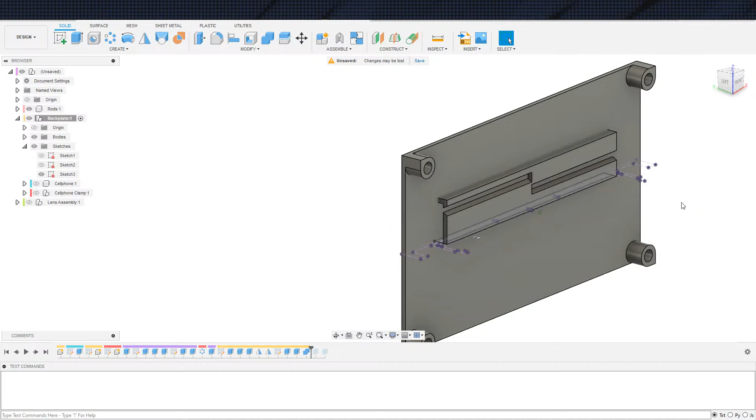Okay, this is what I'm going to do. We are going to back up here and break stuff. New body, okay. And make sure that joins to the correct body. It looks like it. Hop in there, okay, yep, that's fine. The body I actually want to work on, that guy, okay.

The only question left - so as you can see, as I'm sure you can imagine here, I'm gonna go ahead and just share this to finish this off before I start blabbing. I lied, we're gonna put our offsets in first.

New offset please, that way clicking on. And I'll go minus 0.3 because these can be plenty loose. Do we need any other offsets? No, I don't think we do because everything else I included like a 1 millimeter offset on all the other places. So that should be fine.

So as I was saying, let me mirror this really quick before we get to talking bodies. As you most likely can predict, because it's quite obvious, what I'm going to do here is create a slot for this to plug into.

Now that way, this can be printed face down on this side, and these overhangs are nothing right here. The printer can handle these overhangs without any issues whatsoever. So that makes our life easier.

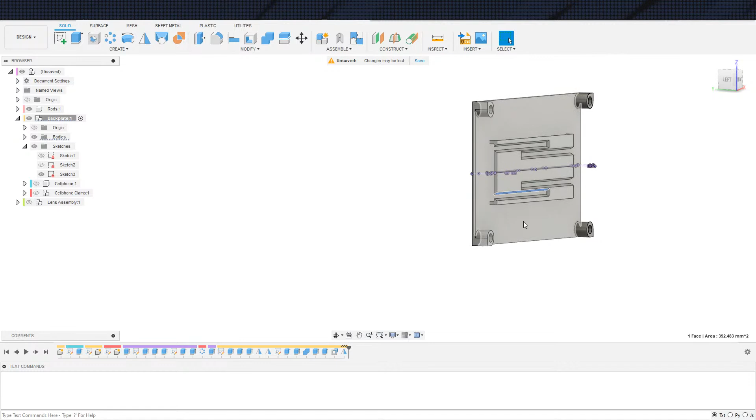The only question is, do I want to only do a couple clips instead of this full length? The problem with doing the full length is that actually makes it harder to piece these two pieces together - you just have more room for error. Whereas if we do just like two little clips on the edges, that makes it a lot easier. And I think that's probably what we're going to do.

Also, pardon me, the other question would be whether or not we want to have any actual mating features as opposed to just a straight joint like this. And I don't think we do. I don't think that's necessary.

So I am going to grab this guy with the back wall and toss this guy and this - that did something weird, I don't know what. That guy and that guy. And we can just call those like 12 millimeters, let's say. I'm happy with it - 12 millimeters.

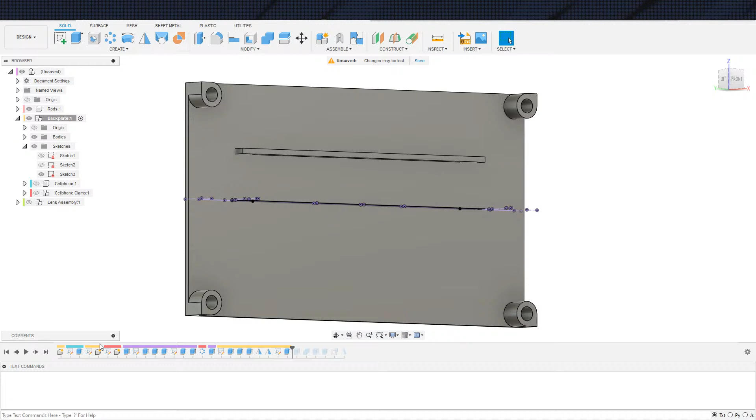And then obviously two ways to go about this. I can either come back to here and change how I'm extruding this, or I can just come back in here, grab the middle portion there, from object there, distance to object there. Actually, you know what, no, I lied - this is definitely easy. I was going to do it a different way just because, but that is silly. It's easier just to modify the extrusion, as I said in the first place.

Alright, cool, so combine other direction, that with that, keep tools. And now that I am not going to have this as part, this should be its own - this is the clamp rack, I guess. I don't know, it is something. It is definitely something.

The other thing that I actually forgot is we do need to cut out for the rubber band in this thing. Let us observe really quick, so as you can see...

As you can see, things are not good, things are not good. Okay, what went wrong here? The top part looks right. The bottom part does not look right. Oh, that is why the bottom part does not look right. Okay, okay.

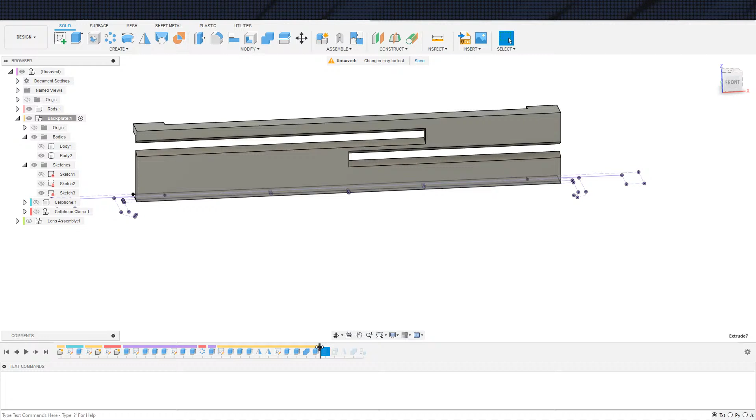Back up. Turn you guys off. How do I want to do this? Okay, you know what, I know how we are going to do this. We are going to... we're going to do this. And then we are going to mirror. That seems the easiest way.

And then I will just update the other stuff, so that gets my cut there, that. And then before I do the offsets, come here, add in an additional profile, which is that guy. Over here, add in a bottom guy. For the record, this does look a little thin, like here and here, but they do have the dovetails. They are slanted, so they're thicker on the backside, so it's not that big - they have some more meat to them, is what I'm attempting to say.

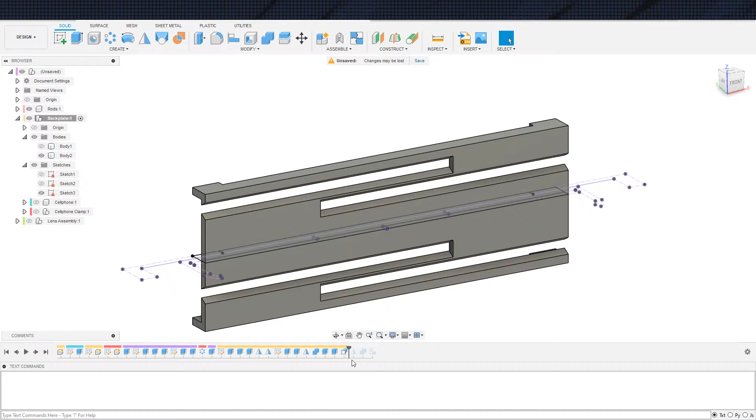And now we just need to add these guys, because we can't mirror them. We could try to rotate them and join, as we did before, but I think it just makes more sense to do this. So that, my holes in the back, send you away, turn you off, just make there. And actually I should also put in my point - I'm going to go 0.1 instead of 0.05 here, just to make sure that we don't have any issues. Minus 0.1.

Okay, I feel like I forgot something. Oh, that's what I forgot. So we still have to put the windows in really quick, but before I forget for a second time, I wanted to come back in here. Cell phone.

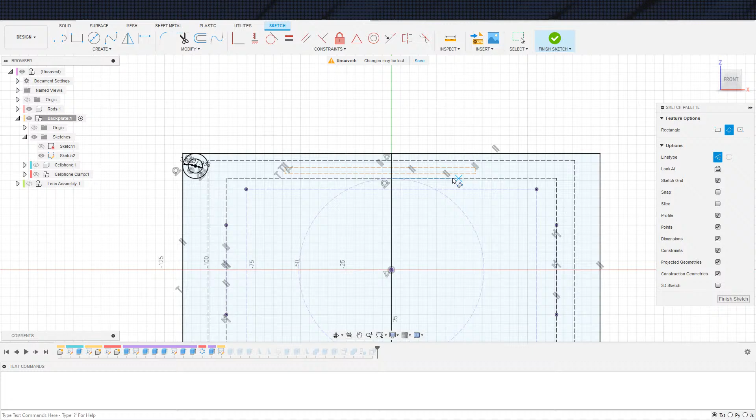There's the cell phone. So I wanted to project this guy out and then toss in those little ledges onto it so that the cell phone does not slide out. I'm just going to make this 3. Obviously there's some space between the cell phone and this ledge, so it can slide a little bit, but I'm not particularly concerned about that.

Finish, get back to the end here, and then extrude that guy out. From object minus... I guess I'm going to just do 12 again. Join. The cell phone is up a bit, all the way up here. The cell phone is 12 millimeters itself. What I could do is go from object and then 12 millimeters, which probably makes sense. Let's go ahead and do this right. So from object, there, plus 12 mil.

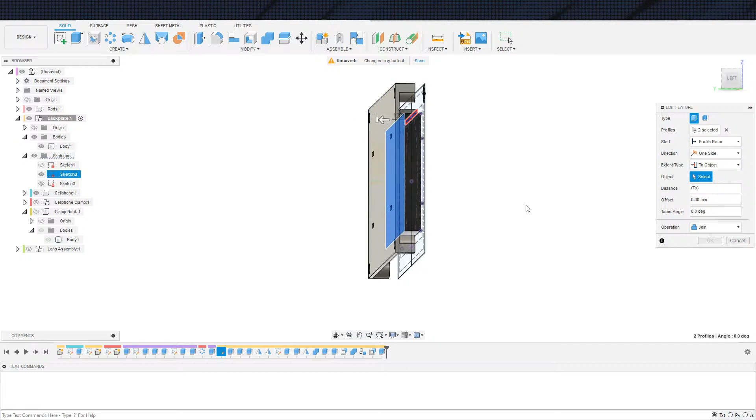Oh, I'm sorry, I'm a doofus. Object here with an offset, 12 mil. Minus 12.

Oh, okay, you know what, in my defense, I wanted to have this done like an hour ago. Again, my night is way behind, so obviously the brain has been through quite a bit. We're an hour and a half in, we're almost done, it's fine. This was the hardest part, the only part that was going to take any serious time.

The last thing to do is to put the windows in here, as I was discussing before. I'm going to turn off the things we don't need, and as you can see we probably just need to toss this in here, project out these back plate clamps as a reference. Then we only need to extrude or create a window. Turn your body off. We'll use this window and this window as a starting point, but we only need to go 30 millimeters from there because we know that's all it is.

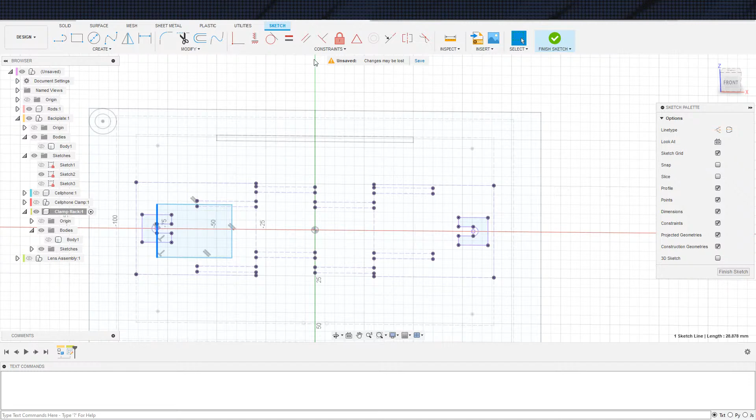So I don't know why I did this, that was a little bit silly, going all the way to the opposite side. This is going to just extend 30 millimeters. Same thing on the other side. Instead of mirroring, I could mirror, but I'm going to just do this as one extrusion instead. My prerogative.

Just because I didn't necessarily say it at the beginning, allow me to mention - okay, that one does get a little thin, it looks like to me. But what I was going to say is, everything is kind of messy here. I don't have names on anything, I don't have parameters, I'm not using parameters. I'm trying to get this done, that is really all it comes down to. And therefore I'm going to eschew all the stuff I normally do, such as keeping things nice.

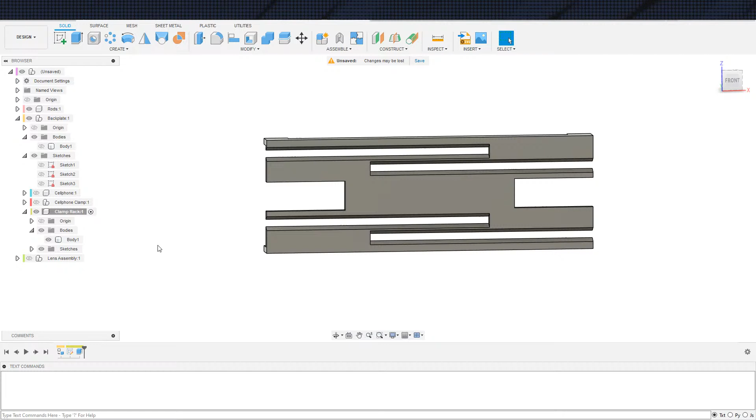Just to reiterate here, obviously that says 0.8 there, but if we go to the backside, the amount of meat on the backside is actually over 3 millimeters, it's 4.5-ish. So even though it looks thin on the front side, it's not actually a thin joint, I should say. All right, enough blabbering, just get the project done. We're almost there.

Actually, I don't need to go in there, I was just going to add a little bit of color, that's all I was going to do. Plastic. All right, you are beige. Like blue. Contrasting color of red. Whoops. I wish undo while you were in there would just undo the last applied appearance instead of escaping.

Turn the cell phone on so that it's on for later. Everything looks good, looks beautiful. Not really, but you know, I'm coping.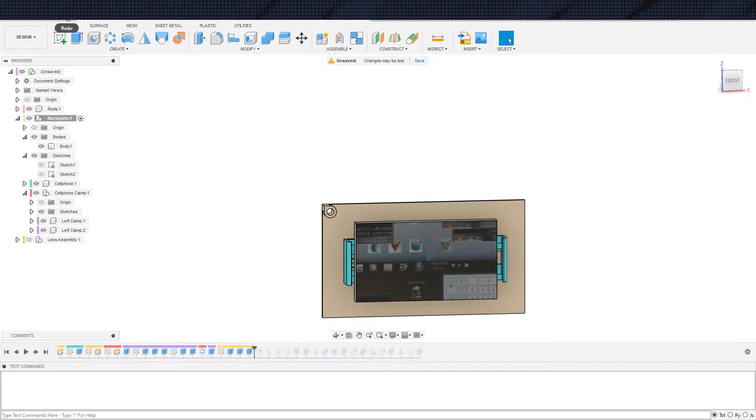Do I need - yeah, I guess we may as well. Come back here really quick and toss a print offset in here. That was obviously not the face. 0.1, 0.05 - I'm going to keep it at the 0.05. Then we just need to make sure we include that here. I'm just double checking this because when I put the offset in there, for some reason it looked extra large to me. I guess it was just my eyes, no big deal.

Okay, now the lens assembly. We know what the size is here, so all we have to do is, let's see, lens plate - hop into lens plate. Oh, nothing is shown, that would explain that one. And that sketch needs to hide because we don't need it anymore. All we have to do is come in here, project out. Attempt to project out the right stuff. I'm trying to get this face, and I would also like these guys, that way I don't have to recreate them.

Okay, and then we can project our circle so that we don't overdraw our outside circle. Obviously that did not extrude correctly, so let's fix that before I do this.

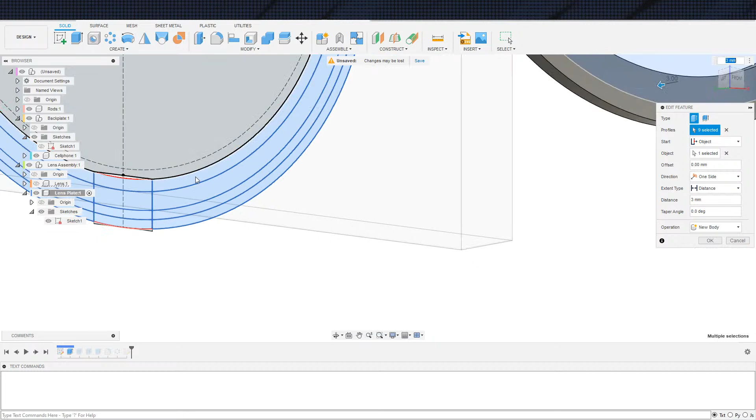That got these corners right here, and hopefully this does not be silly like it was before. Okay, it is not silly like it was before. I don't see any errors, which is good. I was a little concerned that fixing that might actually induce an error. It did not, fortunately. We have all our sketches we need.

So let's go ahead and hide the back plate. And we do not need these guys right here. As you may notice...

So again, we're going to be printing from this side. This piece is getting printed in this orientation, which means that these supporting things are also going to have to change. Also, it occurs to me that I did not include room for the set screws. However, the reason why this is not actually that big of a deal is because it is getting printed on the outside of our case.

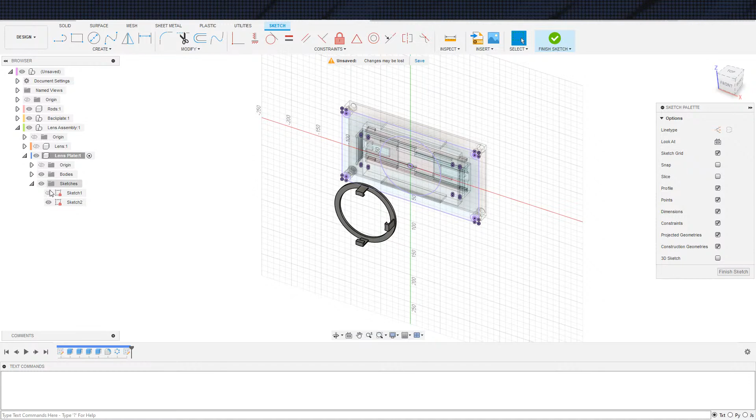So again, our case is going to run around here, right? And this is being printed on the outside. Anything that I extrude this way is on the outside, which means that they can actually be bigger than the back plate. It may look a little bit silly, it may look like they're a little mismatched, but I am going to cry about that when I get there.

Basically, what should happen here is, let's say we're going to go with 3mm set screws, set bolts, whatever you want to call them, to hold the front lens in place. In that situation, I should find out that the nut is 2.5mm... it's late, I can't actually remember off the top of my head.

So, 3mm nut. 3mm nut. Thickness is 2.25, not 2.5, my mistake. So it's 2.25 thick, and the outside diameter is, I believe, something like 6mm. I actually don't remember again. So I could include that kind of stuff over here on the back plate.

Is it that significant? I don't think so. Yeah, I really don't think so.

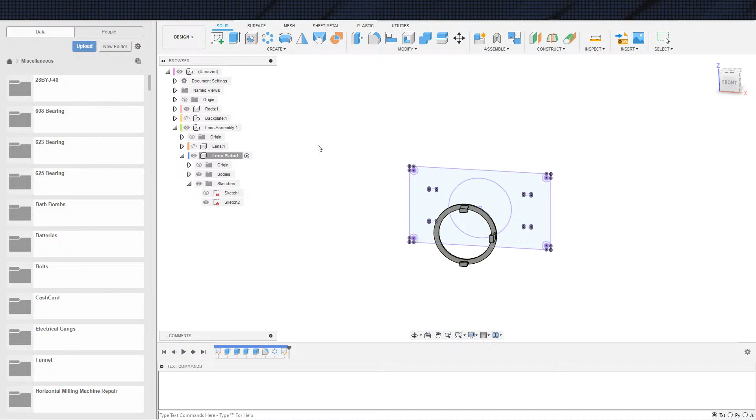And let us come back up in here. I'm going to go all the way to the beginning, and back to fasteners. Close, you for now, don't actually want to add you.

3mm nut. Insert. Proceed. Okay, off, go back to work. And I did this so I can get the parameters.

I am really tempted to go back and fix that, add the space in for the 3mm nut on the back plate, just so everything looks right.

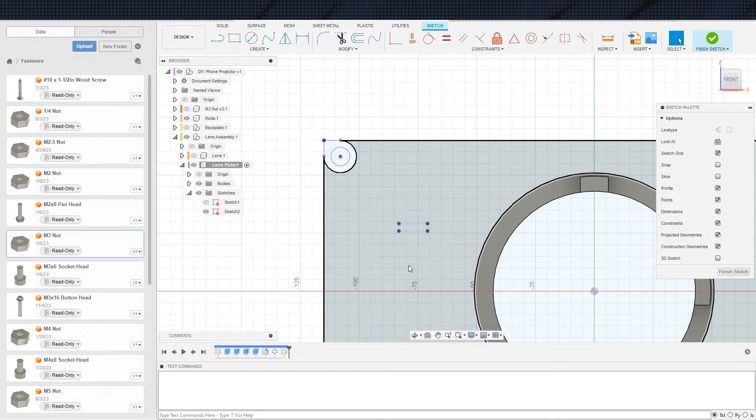All right, you know what? I am not going to. I'm going to resist the urge. No, I'm not, I lied. I lied to you, I can't resist the urge. I'm weak. Okay, we're going to come back in here.

We're going to modify the backplate. Backplate is right here, right here. All right, so we are going to toss another circle in here. From here, this is 2.25 as previously discussed. And then we toss another wall in here.

Actually, you know what, what I probably should do is I should probably just do that. This is going to end up coming off, is what the deal is going to be here. This is going to be 2.25. I can go ahead and put a center line in there and click that.

Attempt to click that. Go perpendicular to that. That is perpendicular, it does not look straight to me. Okay, whatever, that's fine, that's fine. Tangent here, then toss my circle out to here. And then from there, add another 3mm offset.

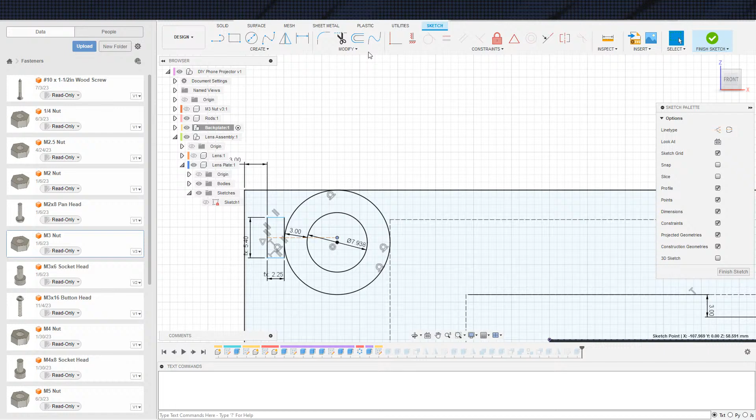You somehow lost, what are you up to? Oh, you were winky-dinked on the wrong circle. That is what you're up to. Okay, there we go, we are now fixed. We are not fixed. Something went horribly, horribly wrong.

Mr. Sketch? Oh, I see what happened. That corner is no longer there. That is why. How do we want to solve this?

So I have two options. I can just extrude the circle out and call it a day, or I can draw some tangent lines and have them come up. That is the other option. I think I am going to just extrude the circle and call it a day.

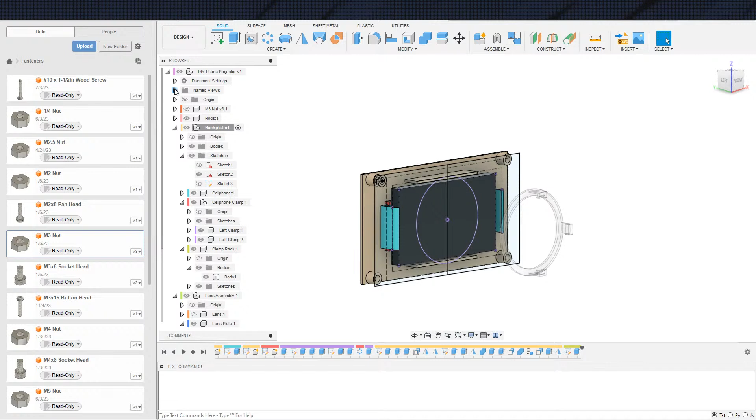Thank you. Okay, great. All right, so now you want to project out. Actually, I guess I don't even bother, right? I can, let's just use it. Okay, we project that out. We draw a 3mm box around it.

So, 3mm. Actually, we already know this edge is 3mm over here, so we can go ahead and linear that, and actually, not cool. Let's winky dink that, just to make it look right.

Okay, so turn this stuff off, that sketch off as well. Turn that stuff off. We want to extrude everything.

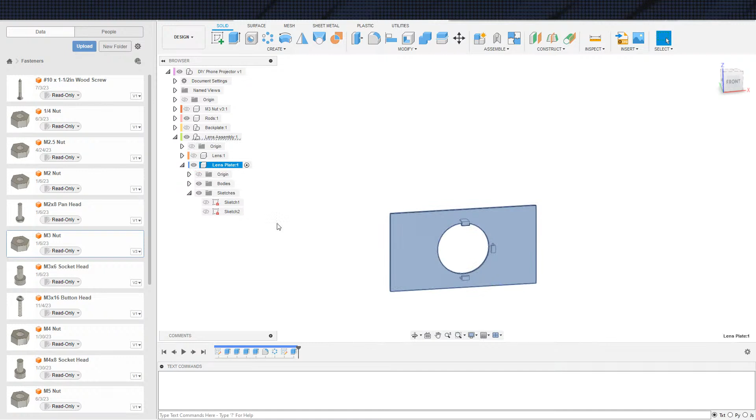Except for that circle. From object there, to object there, and then come back to okay, it got filed away correctly. Thank you, Fusion. You have done something well today. All right, now we can extrude this guy.

Actually, let us... yeah, so all these extra circles that I grabbed earlier, at this point, because we need to add this extra geometry to it, actually does us no good, unfortunately. So let's see.

The nut at this point, the way I set this up, in case you could not tell, because I did width on the other side, means that it is going to face on this. The opening to the nut is going to be this way.

So, the fact of the matter is that I went 12 and we only need about 6 in order to fit the nut in there. So I'm just going to go the full 12, and then we'll position the nut further down the hole, or maybe centered on it. We could also center on it. From object there, to object there.

Okay, evidently I did not do that correctly. To object there, there we go. And distance all. Flipperooski? Flipperooski.

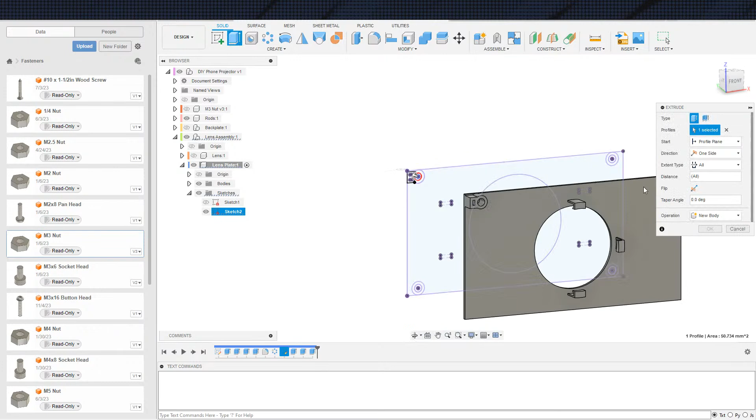Okay, now important thing to note, I already have an offset in here. I am going to add another offset anyway. Also, I just realized that is not an actual circle. As you can see, something has gone horribly, horribly wrong. Okay, so grab that as well.

I'm going to add another offset, as I was saying, onto here, and I'm actually going to go 0.2. The reason I'm doing this is because I want the front to slide freely, because we are going to be locking it in with the set screw.

So, come on the side here, project out the pocket here, look at it, turn the body off, and why does this not look right to me? Let's see what happens.

Where's my hex? There's my hex. Let's go parallel to this, because this should be width. Okay, no, it is just me being paranoid. Okay, we are fine, I'm just being paranoid.

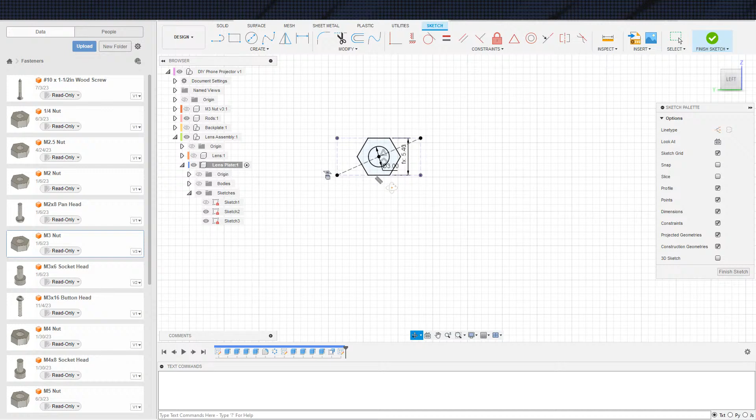Distance from object here, distance to object here. And then we can add a little bit of an offset. Oh, no, I lied, we are actually going to object here, because, again, this is a set screw. Okay, good, good, good, good.

Get this guy mirrored around. Features, this should all be it. Okay, it looks to me like everything turned out well. Actually,

I should also add the offset in here just to make sure that we don't have too much problems with the nut. Actually, it's because the nut is going to be centered on the hole anyway. There's no reason not to give it a little extra freedom. So, go and get the rest of this, the other sides.

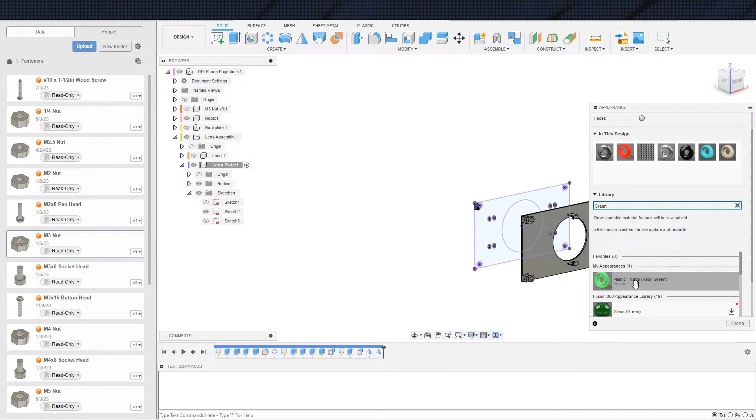I guess I'll take the glossy green down here. Actually, we can toss the rods in. That is the last thing we... just to get the full assembly here. Obviously I did not model up the... well, I kind of did model up the magnifying glass, but that is beyond the point. Where did I hide the... there we go.

From object here, distance to object here. Try to click the correct thing. There we go. New body is fine because these are not actually being printed, they're just going to be here for good looks.

Chrome. Alright, you know what, there we go. On the component itself, and then mirror bodies. That guy. That guy, mirror body. That guy. And we are now done.

I can turn the lens back on just so we can see it. So, that is where we're at. Screen creates light, light gets focused through the magnifying glass on here, and it projects.

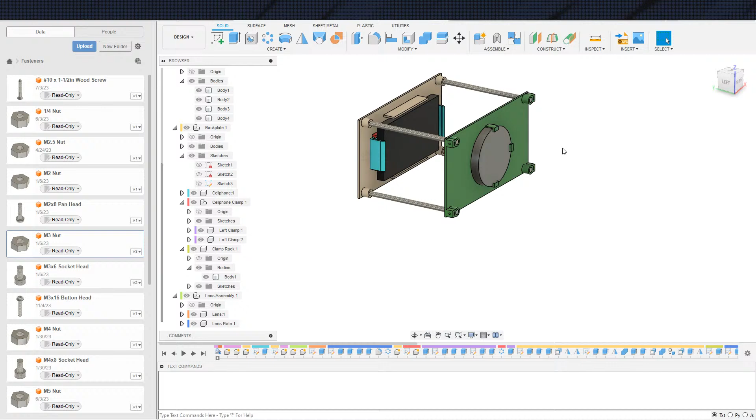That was the backstory on why I had to make this. I didn't actually explain that at any point, but it is now done. Again, hoping it works. The other thing is, because I need to project this downwards, I'm a little concerned about the cell phone falling out. Fortunately, I will be using my secondary cell phone that I normally use as a music player inside of this, so it's not a big deal if it falls, because it's an old cell phone with 2 cracks in the screen. But anyway, point being, at least it's not my primary phone that I record with. That one is being used to record.